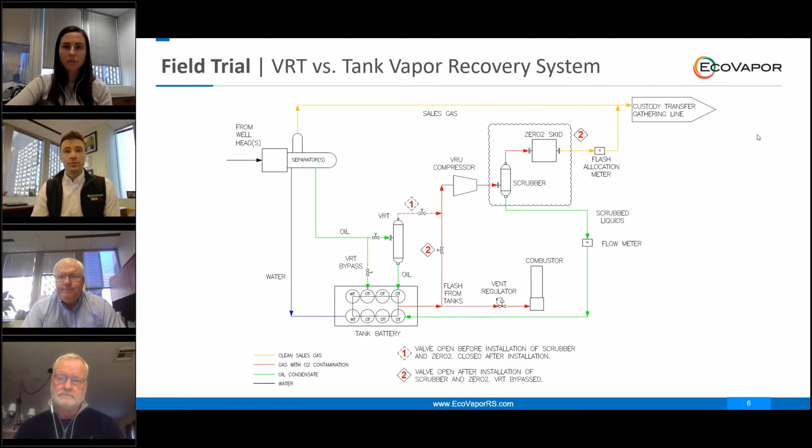We'll take a little closer look at that first scenario where we used the vapor recovery tower to facilitate recovery. Both of these trials were performed on a fairly typical facility configuration, 2 recently drilled horizontal wells in the Powder River Basin in this instance. VRT was used to assist with the vapor recovery efforts in the first phase of the trial. Again, this lasted for the first 11 weeks, and that established a baseline for recovered gas volumes and oil sales.

The purpose of the VRT is to capture as much gas as possible upstream of the tank battery in order to avoid any potential for oxygen contamination by keeping things to a closed system. The low pressure operation of the VRT is important here too, and it's facilitated by gravity assisted oil feed to the tanks.

Speaking about that low pressure of operation, it's typically about 2 to 3 PSI. So in that instance, a simulation program might suggest over 90% vapor capture efficiency. But remember what we were talking about earlier, that time component that's required to achieve that perfect separation. So in reality, well over 10% of that recoverable vapor is continuously flared or combusted with the VRT setup.

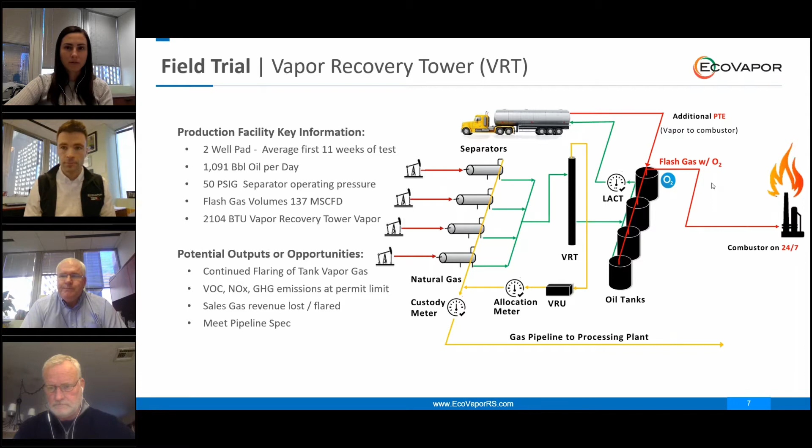Yeah, Hans, what we see here with VRTs in our direct experience is that the process dynamics in a VRT cause some hydrocarbons to go into the vapor phase when without the VRT, those hydrocarbons would stay in the liquid form. That's absolutely right.

So in the second phase, the vapor recovery tower was taken out of service for that subsequent 11 weeks, and an oxygen removal skid and 2-phase separator were utilized to facilitate recovery in place of that VRT. This allowed the vapor to be collected and recovered directly from the tank battery.

Also, the recovered stream from the tank batteries turned out to be super rich. It wasn't necessarily a surprise to us, but in this case, it was over 500 BTU more than the VRT gas that was recovered. Knowing how rich that stream was, we did want to try to give any recovered heavy NGLs another bite at the apple so that they could be sold as liquids in order to capture their full potential value.

Concerns did exist about creating a propane loop. That's essentially where we'd be spending horsepower by moving propane in a circle between the tanks, the VRU and the scrubber, over and over again. But actually, we did end up seeing immediately an oil production uplift, and that's measured at custody transfer, not just the Coriolis meter on the bottom of that 2-phase scrubber. So, in other words, by capturing more vapor, EcoVapor's client was also selling more oil.

This result's been repeatable. It's been observed in over 100 ZerO2 installations. And other things that we typically see with the ZerO2 installation include high uptimes. In this trial, the oxygen removal equipment uptime was over 99%. And the VRU uptime in that second trial was 98%. Actually, the tank vapor capture setup helped VRU reliability by minimizing any effects from slugging. There was no potential for any liquid carryover, things like that.

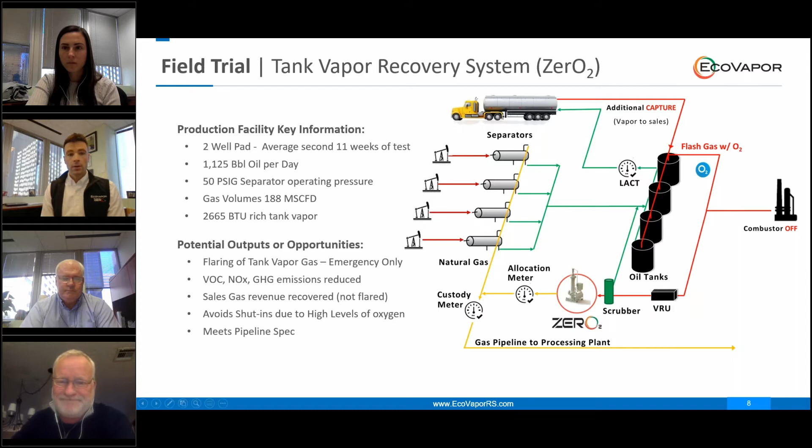So just talking about this head-to-head trial, it is obvious to probably everyone on this call that vapor recovery towers and ZerO2s serve similar purposes, and that is to try to reduce emissions by way of facilitating vapor capture. The difference does come down to performance, and it's highlighted by the ability to capture all vapor, including from oil tanks, produced water tanks, even oil haulers, and that's what helps to demonstrate that ZerO2 is the most economic solution to achieving this environmental goal.

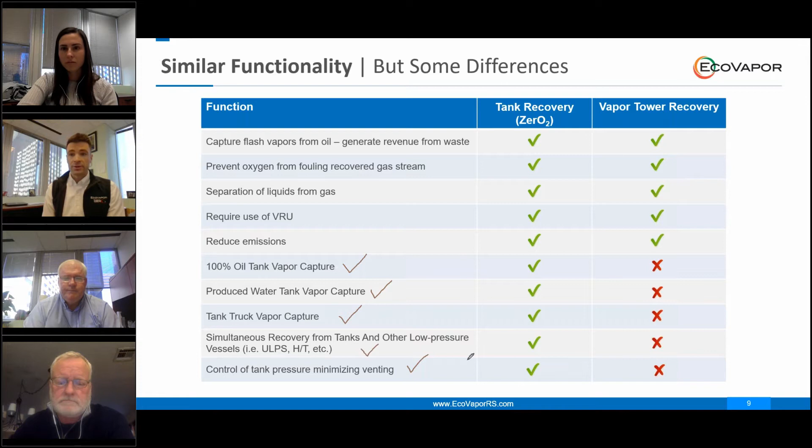One other differentiator that's worth mentioning is that venting is virtually eliminated because the oil tank batteries and water tank batteries are actively controlled in their pressure. I'd like to provide a brief overview of the equipment itself. In all ZerO2s, regardless of size or capacity, it's a precious metal catalyst that facilitates the oxygen conversion reaction. In all ZerO2s, the catalyst isn't consumed in the process. It's a true catalyst, and it does require regeneration about every 12 months, a lot of times longer than that, but that gives you a good idea of the periodicity of replacement.

Currently, EcoVapor's two most popular models are the 300 MCF a day capacity unit and the 1.2 million, or 1200 MCF a day unit. Both skids, in terms of footprint, are about 4 foot by 4 foot. And it was one of the E300s, the smaller units, that was used in these trials to produce these results. They are totally deployable in parallel. We have had up to 6 of these units in parallel on a single facility. And in terms of operating pressure, we can get up to 410 PSI maximum allowable working pressure. These units are sensitive to H2S, but many sweetening options are available. We'd like to talk to you about them.

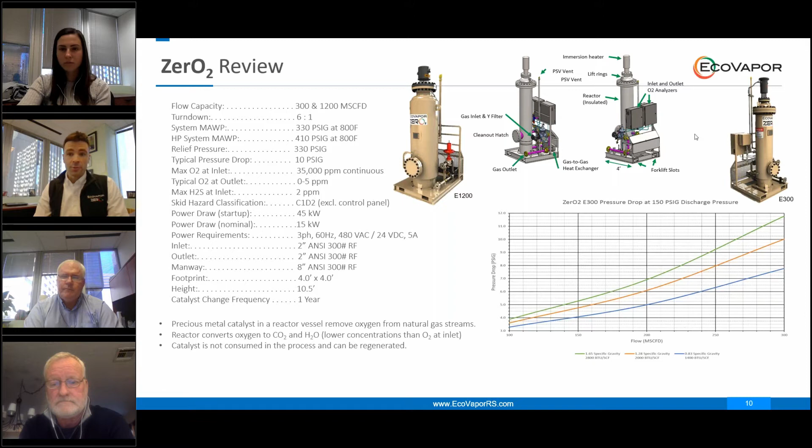And bottom line is that ZerO2s absolutely nuke oxygen. We can typically handle up to 50,000 parts per million oxygen. That's 5%. And that translates to about a quarter of the overall stream can be air, and you can sell it. Any more than that 50,000 parts per million can cause the unit to stop accepting gas while it cools down. Typically takes about 20 minutes or so before it places itself back in service.

Y'all probably don't need a reminder that it's 2020, but in 2020, remote monitoring is nothing new. That said, EcoVapor has tried to take this into new territory. Not only are EcoVapor's controllers perfectly compatible with existing SCADA systems via Modbus RTU if you prefer serial communication, or TCP/IP if Ethernet is your preference. Other protocols are available as well. But EcoVapor also facilitates monitoring on our own network, where every parameter of every piece of equipment is monitored and stored every 2 minutes, and that provides us with high resolution data trending. We can look back at any site, and so can our clients, over any date range and see what was going on, and it only takes 3 clicks of a mouse.

Tank pressure can be monitored and archived for record keeping. EcoVapor's network even facilitates remote control. We can see the touchscreen of the unit on our phone or computer, just as if we were standing on site. We can even upload updates to operating code remotely. All of this allows EcoVapor to address any issues before they become problems. And typically, to be honest, we're helping operators address other facility issues like drifting pressure sensor calibrations, things like that. And that's what allows EcoVapor to achieve a 99.8% field-wide uptime, and that includes any planned maintenance. One last thing I'd like to mention is that EcoVapor's network was what was used to record and store all the data from this trial, and that's what we're looking at.

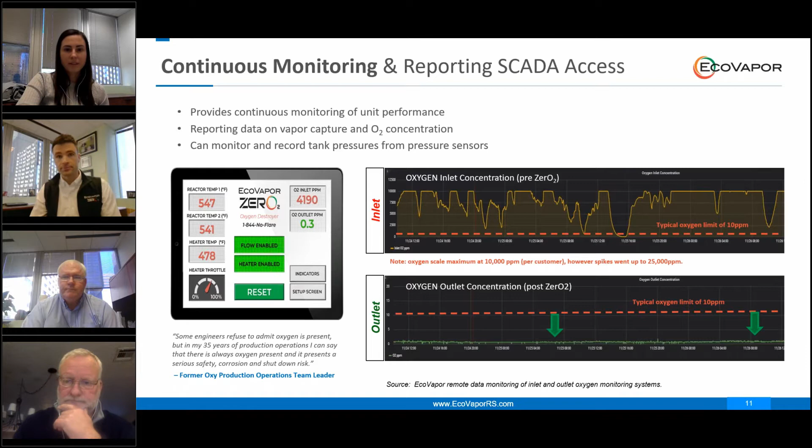Yeah, thanks, Hans. So I'd like to walk you through the results of the trial that Hans just described for us. This is based on information provided by the operator over the same 77-day monitoring period. The operator observed overall a 3% increase in oil production and a 37% increase in tank vapor gas capture with the tank capture configuration compared to the VRT. This results in a 98% capture efficiency for the tank configuration versus the VRT. In addition, as Hans mentioned, the operator observed an increased BTU content of the gas captured in the tank configuration as a result of the vapors being pulled directly off the tanks. This translates to the operator capturing not only more gas, but more valuable gas.

So overall, the operator reported that the present value of the full tank vapor capture scenario was approximately 2 times that of the partial capture scenario. Thanks, Emily. If it's okay for me to jump in, I'd just like to take 1 second to point out that there are some rare instances where a ZerO2 installation does provide less than positive economics, but in each of these instances, EcoVapor and the operator were well aware of the economics specific to that installation and chose to continue to move forward for external reasons.

One example that's coming to mind is when EcoVapor's client chose to install tank vapor recovery equipment at an older well site that was located directly across the street from an elementary school. And although EcoVapor did convey to the operator that we didn't believe that there was enough recoverable vapor volume to offset the equipment and installation costs, the producer did feel that in this particular instance, there was enough of a reason to prevent continuous flaring on site. That doesn't happen very often.

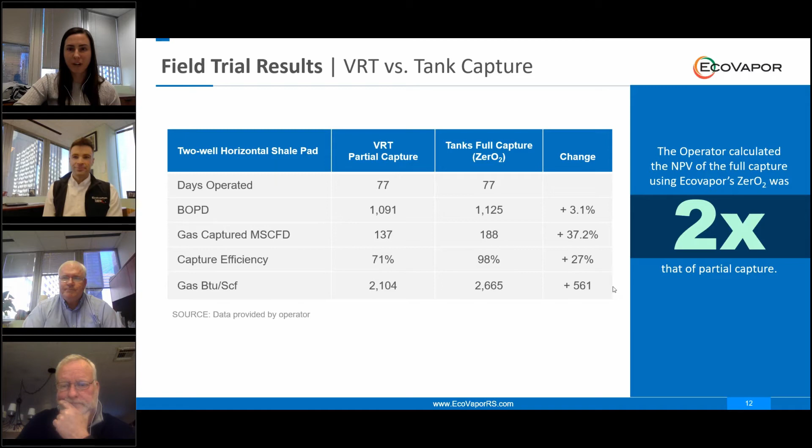Those are the one-offs. Almost all EcoVapor installations are significantly above break even, with sold equipment paying back typically in a matter of months. And it's really not that hard to understand why when you're looking at these numbers. We can capture more richer gas and sell more oil by preventing that from going up in the air. Right on. All right, could you walk us through the next slide?

Yeah, let me take a shot about gas going up in the air. So we estimated the impact on the emission profile of the site. We annualized the volumes based on the actual data over the 11 weeks of the total trial. One reason is typically emissions are reported in tons per year, so we were trying to keep that consistent. We looked at 2 different kinds of emissions.

On the left, you'll see regulated pollutants. And we made some assumptions to come up with these numbers. We used the actual volume data, but we assumed in this case a 90% VRU uptime and a 98% flare destruction efficiency to calculate these figures. And we used, in the footnote, the emission factors from EPA's AP-42 for the combustion products. You'll see with direct capturing from the tank, you capture more vapor, you have lower emissions from flaring.

And on the right side, we address the greenhouse gases as well that are not currently regulated. They're reported in some regions. In this case, we use the hydrocarbon density factors from the EPA's greenhouse gas rule in the Code of Federal Regulations. Overall, you'll see about a 2/3 reduction in emissions, and it's really kind of simple. If you capture all the vapor instead of flaring it, then you don't have the emissions that are associated with that activity. I might add as an interesting side that not every state regulation treats these 2 configurations, these 2 capture methods the same way.

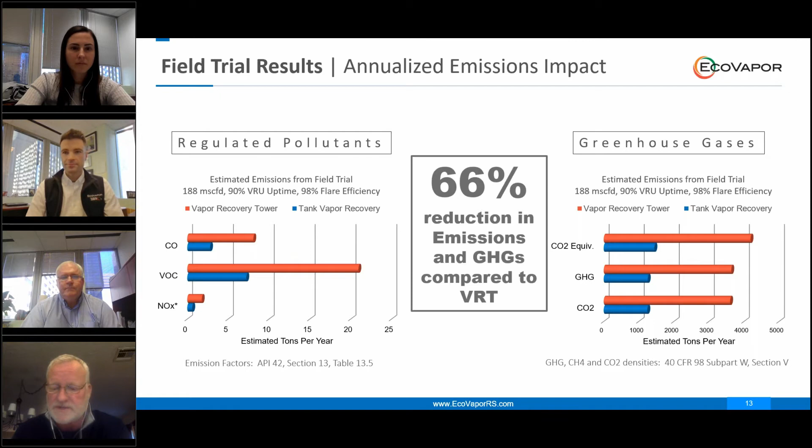Other states, like Colorado, don't view it that way. They handle it differently. They don't consider capture from the tanks to be part of the process. And it's an important issue for the operators to understand. So stay tuned, because after the first year, our next webinar will be covering the regulatory treatment of tank vapor and vapor management. Emily, can you share with us the winner of the contest?

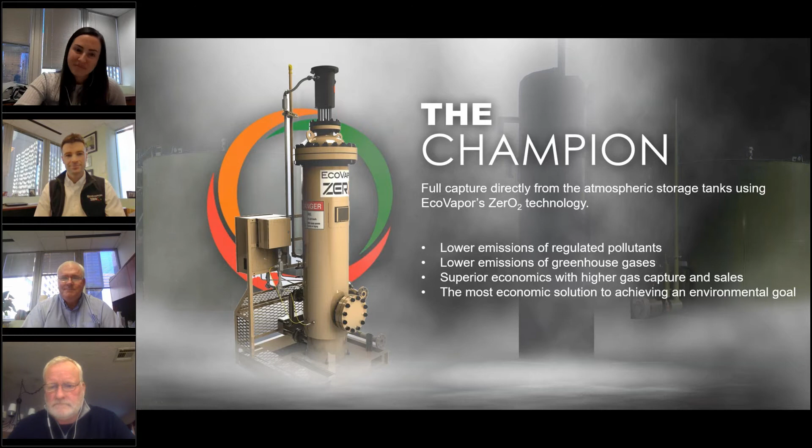Yes, so I get to do the honors. Okay, so based on the configurations and the results we just walked through, I'd like to officially declare full capture from tanks using EcoVapor's technology the superior technology and champion of the trial. As we just discussed, this configuration resulted in the lowest emissions and best economics. So it really was the best solution for the operator in achieving this environmental goal of reducing tank vapor flaring. So let's move on to the next slide.

Yeah, yay, I wish I had a bell.

But as an add-on to that, the operator ran this trial for us, provided some great data on the economic benefits of the full capture solution over a 77-day measurement period back in 2018. But I'd like to spend a moment briefly summarizing the illustrative benefits of the solution on an annualized basis in the current environment. Here we took the same oil and captured gas production data that the operator provided, but conservatively assumed only 1% of the oil sales uplift was directly attributable to the EcoVapor configuration. We also declined those volumes off by 55% in the first year to simulate first-year production decline of a new well pad.

So, applying current equipment cost, net commodity pricing, et cetera, really taking the analysis a few steps further by applying an illustrative royalty burden, midstream gathering and processing metrics, and production and ad valorem taxes, we truly got to the free cash flow to the operator under both configurations. Similarly to the results observed by the operator in the field trial, we calculate that the tank capture solution using EcoVapor's technology provides over 2.5 times the present value of the partial capture solution using the VRT, again over this illustrative 1-year period. And this is despite slightly higher equipment costs associated with the tank capture solution.

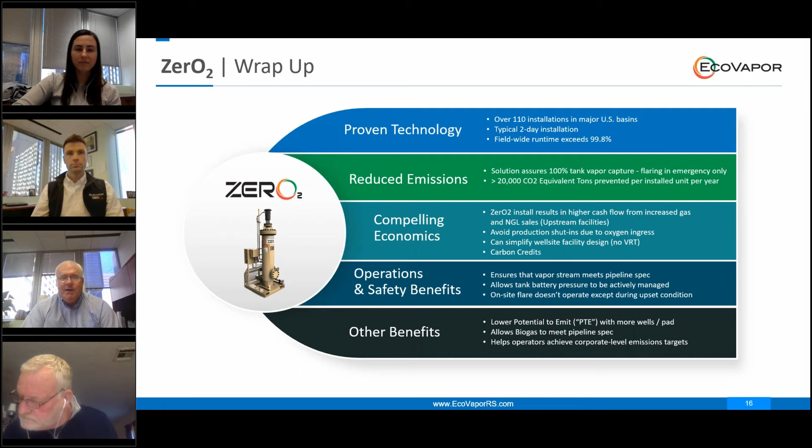Yeah, I'm scribbling some of these down right now, Mike. Got a lot of good questions coming in. Okay, great.

Let's start. One, Hans, you might want to handle this. So we've got a question about nitrogen. Can the ZerO2 handle nitrogen? Or a question about the limit or the effect of nitrogen. There's really no effect of nitrogen, being an inert gas. It's essentially pass through.

CO2 in high concentrations can hinder the reaction. Doesn't mean that it won't happen, but we just have to operate at a higher temperature to achieve that same efficiency. But in terms of nitrogen presence, that shouldn't help or hinder either way.

Now let me follow up. If there was a very, very high level of nitrogen, would we have enough C's and H's to do the reaction? Yes, as long as hydrogens are present, or hydrocarbons are present. Yes. Even hydrogen would work. Okay, I have another question, and I'll just answer it myself. Yes, we sell and lease the units depending on the customer's preference.

Let's see, I've got a question here about, do we have data, Hans, from the trial on the effect on the RVP and the API gravity of the oil sold under the two scenarios? Yes, good question. So when we do add that two-phase liquid scrubber downstream of the VRU when operating directly off the tank battery, we are harvesting NGLs. They are the heavier side of the NGLs, but we are harvesting those and then sending those back to the

Yep. We get compliments from our operator customers that our systems operate very effectively and very reliably. The management of a gas blanketing system or other things could consume bandwidth with the operator, whereas our customers say, we put in the EcoVapor system and it just works and we don't have to worry about it anymore. So that's certainly an advantage. Also, our ability to manage tank pressure very effectively and very reliably. Our system is so reliable that you can permit around it, and you can count on those consistent results.

Interesting. I've got a comment here. It's actually not a question, but it is an operator who's indicated that he's assuming that if we control the tank pressures, we can keep the hatches closed. And they see that as a benefit, particularly in high H2S regions, where being able to have surety of keeping those hatches closed is a real benefit.